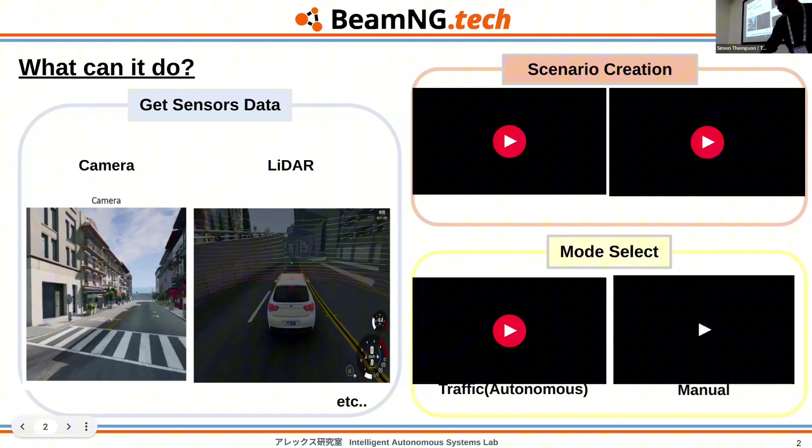So let me go to the next slide. This one. One of the things that motivates us is the availability of maps in Japan, which is something that we don't get from other simulators. Meaning that you have the possibility to drive on the left side of the road. That small thing creates a domain gap. You train something on a simulator, for example Carla, driving on the right, and then you try that on a different side and it doesn't work sometimes.

So BeamNG has plenty of mapping, not only Japan, in plenty of environments in the world. So that will serve to close the gap. The other thing is that BeamNG is being actively used in publications. So just a few extracts of what they have, and they want to attract the community. So they kind of check which publications are referring to their simulator, and they just put the papers on their website. This is their website.

What wasn't available was a way to connect BeamNG with Autoware, so that's where we entered. As I mentioned, we have opportunities to use BeamNG for applications in Japan. So not only maps, I have to say that the number of maps is not super abundant. We have like 4 or 5 different maps, but they are several kilometers long, and they are very realistic. The person insists on the realism of the scenes.

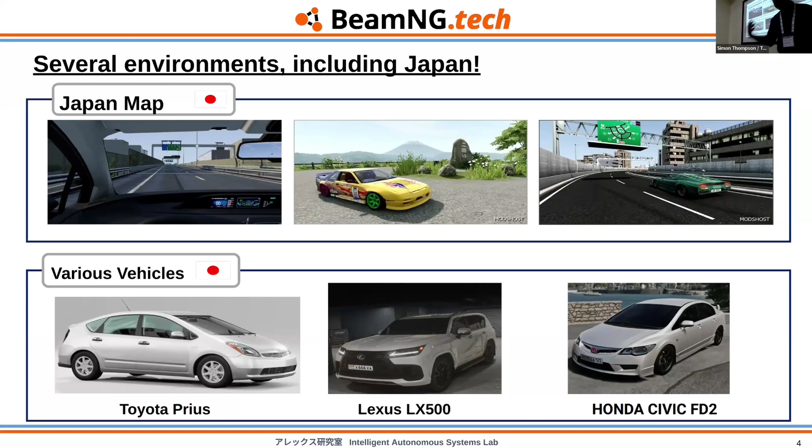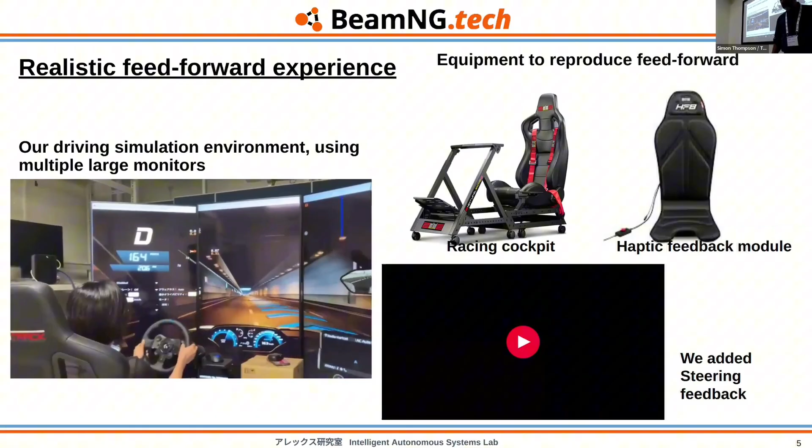So we began with creating a driving simulator with multiple screens. We have three 50-inch screens combined together, the one that you can see in the leftmost video. And then we have the Next Level Racing cockpit. Currently, it's not the articulated one, so you don't have vibrations yet. We need to do more to get that. We have haptic feedback, but the hardware is not the core part of this talk anyway. We did want to provide more feedback to the drivers.

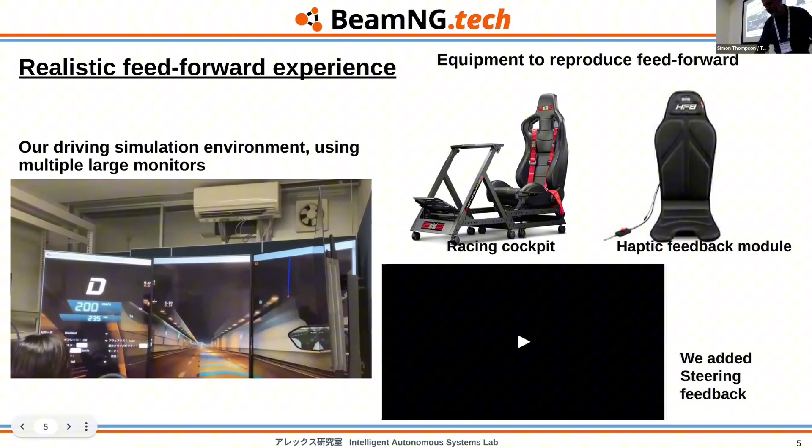So, for example, we also connected the steering wheel with BeamNG and changed the controller so that, for example, you can see the car is losing control and the steering wheel is also losing control. So then you get some additional feedback when this kind of situation happens. Again, the hardware is not the core part. Still, having haptic feedback is very positive when you have experimental subjects and you want to get their impression. For example, one of the research topics we have done is subjective risk, whether the driving improves their sensation of risk or not. But that's a little bit outside of the discussion today.

So up to now, just a brief discussion of what BeamNG is. The other technology that we used, and I'm going to explain why later, is Zenoh. Zenoh is a very low latency protocol that currently is being used as a replacement for DDS in ROS 2. There is already a Zenoh DDS bridge so that you can get data across the Zenoh protocol and then back into ROS 2 topics from one end to the other. So we are leveraging Zenoh. I'm going to get into more details later.

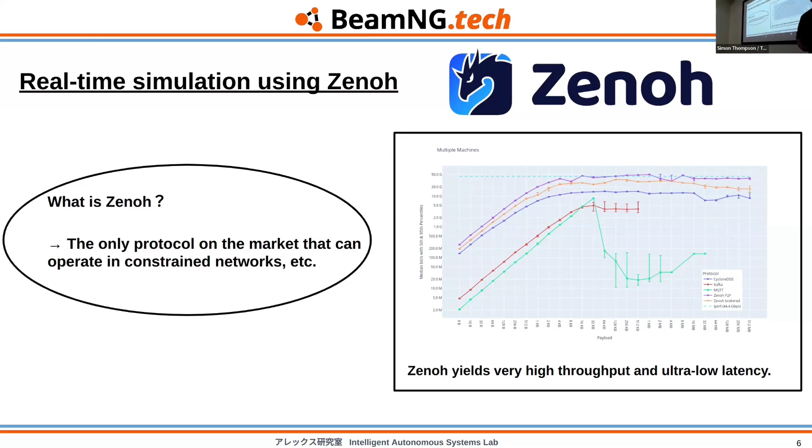And especially when you are driving using a simulator, for example from the pilot point of view, you operate your vehicle remotely. You want to get the data and operate that remotely, and you want to decrease, of course, latency. We are doing this kind of remote operation research and also simulator in the loop. So you have the simulator, the person, and then the simulator is related to the real world environment. So we also want to match these two things together, hardware and simulator.

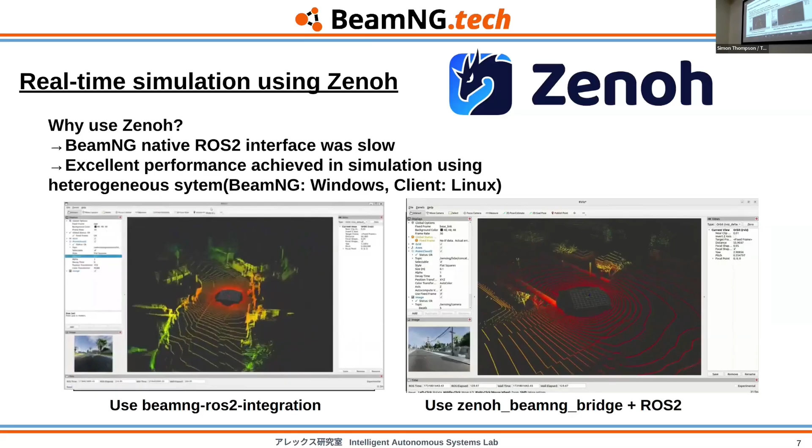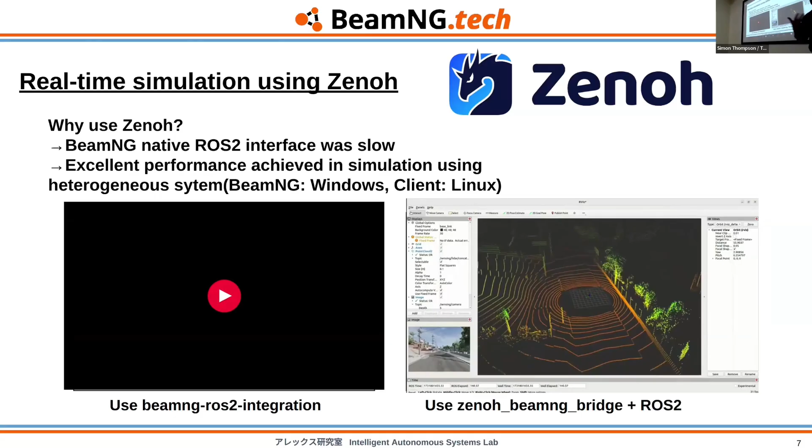Right. So what we do: BeamNG, at least BeamNG Tech, knows that ROS2 exists, and they have already an interface for ROS2. So we are not creating anything new, but it was extremely slow. So you are getting a LiDAR. LiDAR is producing results presumably at 10 hertz, but what we measure is 1 hertz or 2 hertz.

And not only do you have LiDAR, but you have multiple other sensors that you are trying to get. It's not a network latency issue; on the same computer where BeamNG is operating, we just get the topics there, record the topics there, and then you get very slow response time. So instead of using the native interface that they provided, we stepped in and created a bridge that we're going to get into in more detail later on.

So BeamNG Tech, I don't know whether they have a version working on Ubuntu. So our implementation has the simulator running in Windows, and then the client, for example, running Autoware in Linux. So that's how we have them connected. So then what we have is the Zenoh BeamNG bridge that we created. It is open source. And then once we have the data passing through from Zenoh, we can, yeah, yes, please.

Is this a VM or two physical machines? Two physical machines. Yeah, so they can be connected. I mean, because of the low latency, you can have them in different rooms. It's not much of a problem. So no, they're not virtual machines.

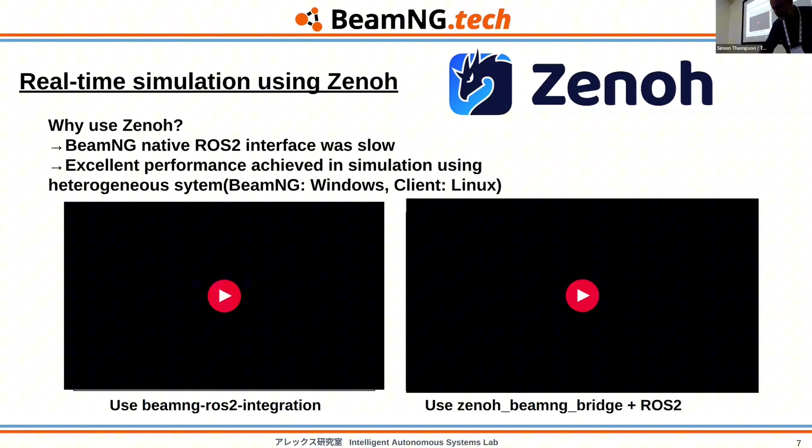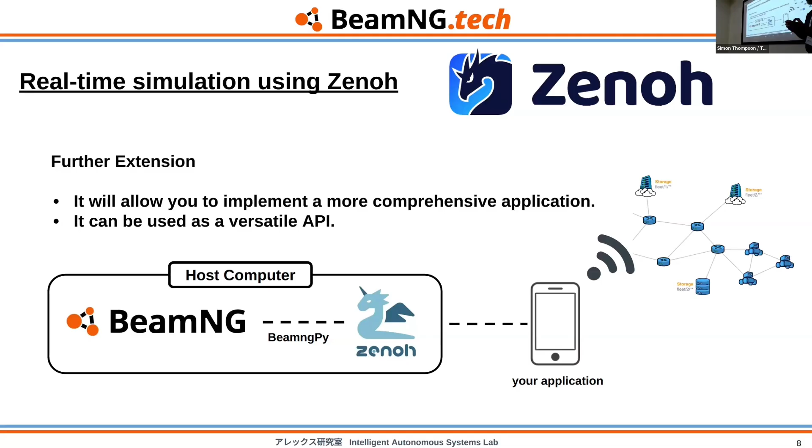So, right. So that's what we're doing. We have BeamNG. We use the Python interface that BeamNG provides, BeamNGpy. Created a Zenoh-based bridge, and then we have that transmitted, and then we can do anything that's necessary. Of course, our purpose is to use Autoware and get the BeamNG data to Autoware and Autoware back to the control so that the BeamNG vehicle can move. But of course, you can do anything else. So it's not tightly integrated. The BeamNG Zenoh bridge is not fundamentally dependent on Autoware, so you can have multiple different applications.

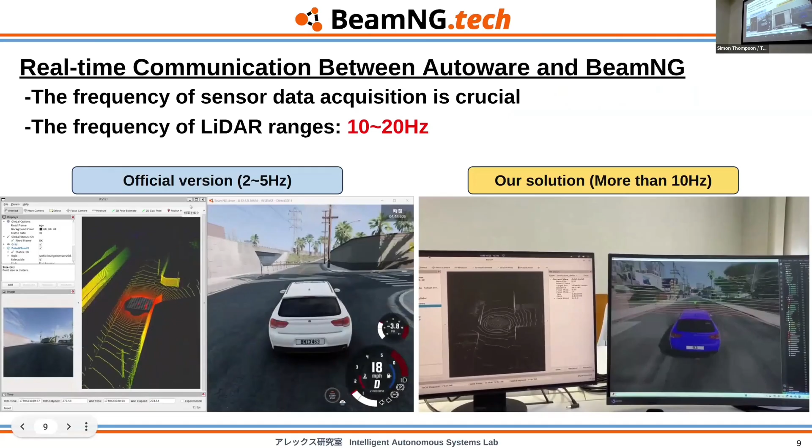So this is what I mentioned before. It's difficult to show in this video, but basically the two videos are different. One is very choppy, 2 to 5 hertz response that we obtained. The other one was just real time, no delays observed when we are getting the data. And then you can see the data being sent and visualized in RViz. So after we pass the bridge and get the Zenoh to ROS conversion, you can visualize it normally. So it was one small step that we added into this implementation.

So we have one end of the road. The other one, perhaps if you are familiar with Autoware, is not so complicated. Now you are able to get data from BeamNG. So what do we do next? Autoware needs maps to navigate: point cloud maps for the LiDAR localization. We need to have HD maps for the planner's navigation. So that means we need to collect BeamNG's data, at least LiDAR data, to get the point cloud. And then, based on that point cloud, use existing tools to make the HD map. And that's enough for the Autoware side.

So yeah, you can use whatever mapping software you are familiar with. We use LIO-SAM a lot. If you check the Autoware GitHub site, in the tutorial pages you can find which mapping solutions exist that can be used and have been tested with Autoware. Some are ROS1 only, so then you need to meddle with the topics that Autoware is using for LiDAR, for example. LIO-SAM is directly ROS2, so it is easy. You just need to have LiDAR and IMU. Both are provided via the bridge.

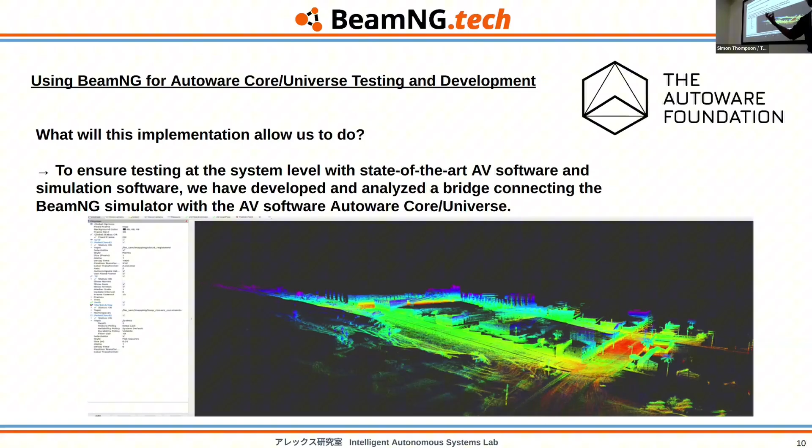So we are sending camera data, and we have LiDAR data and IMU data from BeamNG Tech back through the bridge to Autoware. So then we can record a ROS bag with this data. And then after that, just play the ROS bag file, populate the topics, and then use LIO-SAM, which also uses ROS2, connect with the proper topics, and then render the map.

So again, this discussion is not about mapping, but if you have any questions about the mapping tools, of course, I'm happy to explain. But this is just the process of building the map as LIO-SAM is executing. LIO-SAM again depends on IMU for posture correction. LIO-SAM is a graph SLAM method, so loop closure and everything is handled. So that's a correct tool.

And for the HD map, we use the Tier IV vector map tool, or Vector Map Builder, I think is the name. So basically, both tools are available online, so you can use anything that you require. The Vector Map Builder, I'm afraid, is by hand. So this was done by hand by somebody. I guess we can use some automated tools for making Lanelets, but we did it manually.

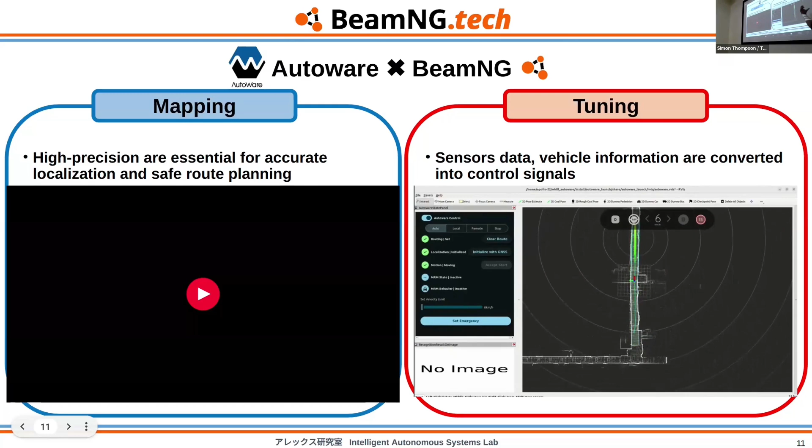So anyway, it was a low scale, not very large map, a few hundreds of meters. So that's basically by hand. But yeah, maybe other tools can be exploited. Then we have the point cloud for localization. We have a Lanelet2 map necessary for planning. And then we have the necessary data.

Okay, so once you have, yes. Question for the concept: so you get the point cloud, then you make all this map building, manual steps and so on, and then again you localize them? Yes, because we need to make a map, right? Autoware needs this. BeamNG is not providing the map themselves. I just want to ask, does this work completely with this virtual approach? We don't need any real one, right?

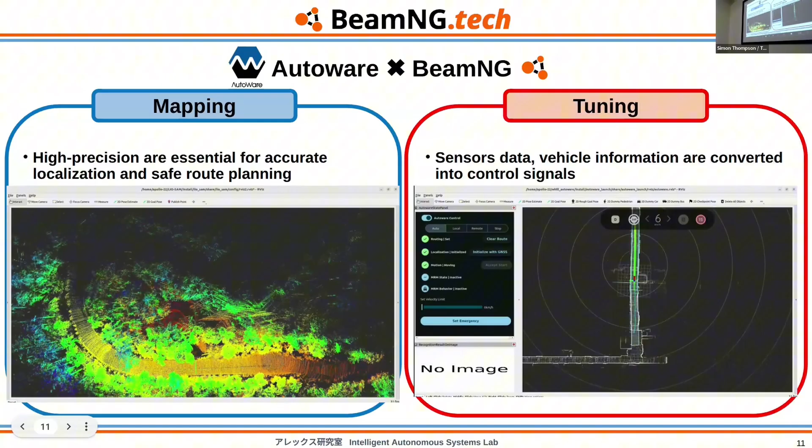Okay, well, if your map happens to be the same as the real world, yes. But no, this is within the virtual world. I mentioned that BeamNG has a lot of emphasis on realism. There is a road in Japan that they also have in the simulator that's very much the same. But of course, there have been different changes in the traffic infrastructure, buildings gone or new buildings constructed. So that may decrease the performance of localization. We haven't tested cross real world versus simulation localization.

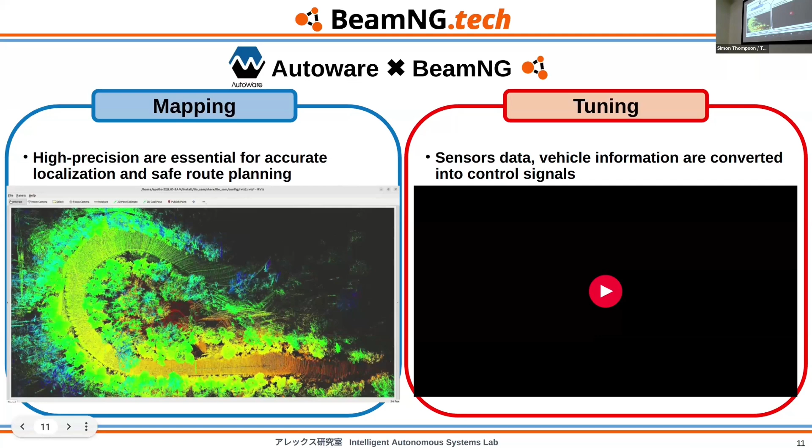So basically, this is a map of a mountain in Japan, Mount Tsukuba. So it is a mountain road. We just get the data from the simulator into a rosbag file. Just record the LiDAR data, IMU data and camera data as they are provided. Then in an offline mode, we process the LiDAR data with LIO-SAM and other mapping tools to create the point cloud. Once you have the point cloud, you have to create a Lanelet map. The current Autoware Universe depends on maps. One of the efforts of the community is to remove that dependency, but again, outside of the scope of this talk. So yeah, all that's done offline.

Then presumably you have the point cloud that corresponds to the virtual environment, so you can link the two things together. There are some driving simulators that allow you to get directly in one go the map that you require. I think CARLA provides that. Among the different things that the CARLA bridge provides is the point cloud map itself, and because they use the OpenDRIVE format for HD maps, they are able to convert that into Lanelet2 and also send it as a topic.

BeamNG doesn't have that yet. We have been working with the company to mention what we require. So this process of mapping may become unnecessary in the future, because they have the renderer. So they are able to export directly the point cloud maps and the road network. If that's available, then we don't need to do this.

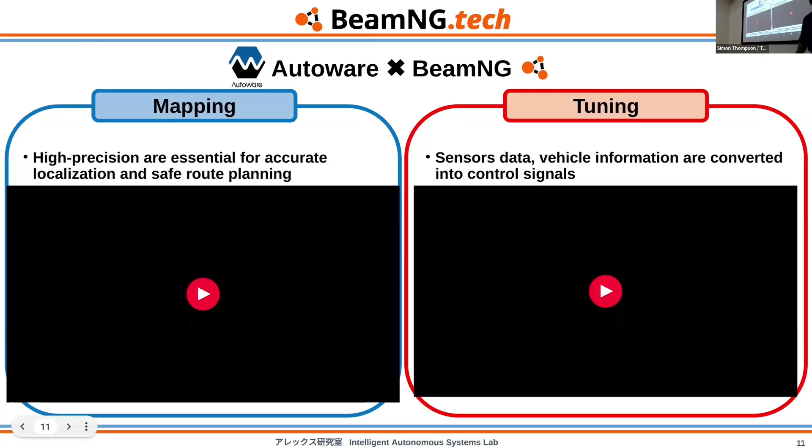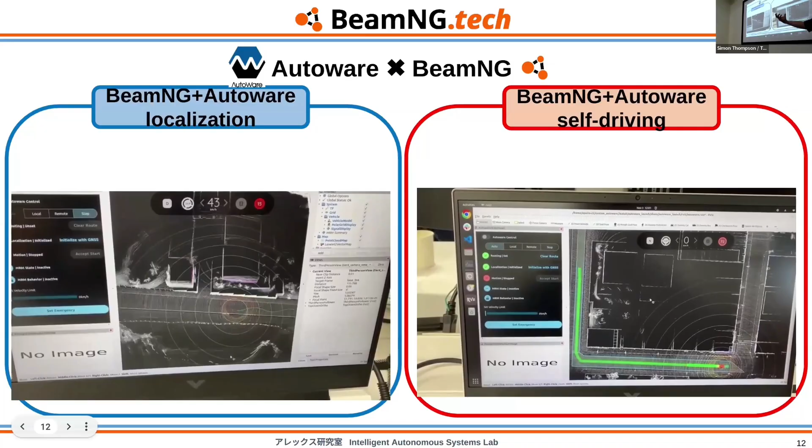Okay, so now that we have the point cloud map, we get localization. Actually, some person is using the steering wheel, showing Autoware is keeping its position correctly, no matter if the car is zigzagging along the road. We have two computers. BeamNG is sending LiDAR data across the bridge, and we have the offline map that we created. The LiDAR data comes in and localizes with the map on the Autoware side. And so you are able to get this kind of result.

The other thing that you are seeing now is Autoware localizing, and this is self-driving mode. So now we are in control of the vehicle. The video before was in manual mode, so somebody was just swinging the steering wheel.

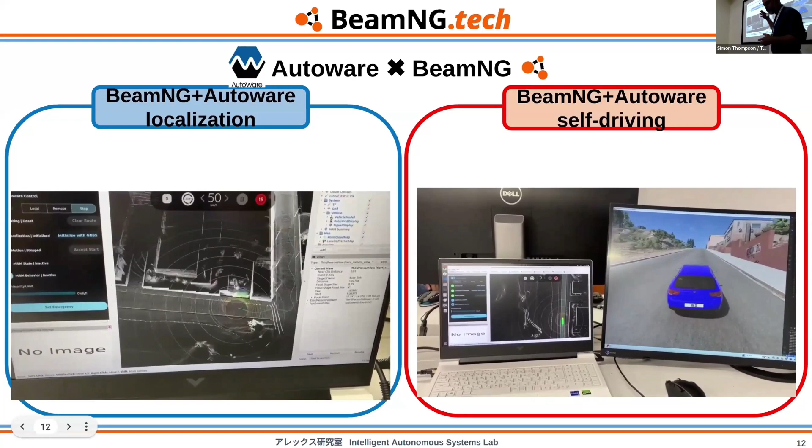And then we can confirm the localization is working okay, because you can see here that the position of the car is correct in the world coordinates, or at least in the map coordinates that we have. On the other side is BeamNG, and we are running Autoware. So here we are defining the destination somewhere there. So now planning is done, and then we can start driving.

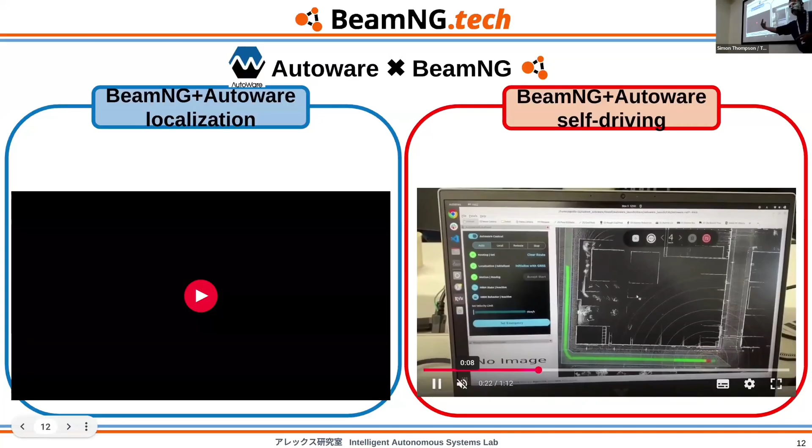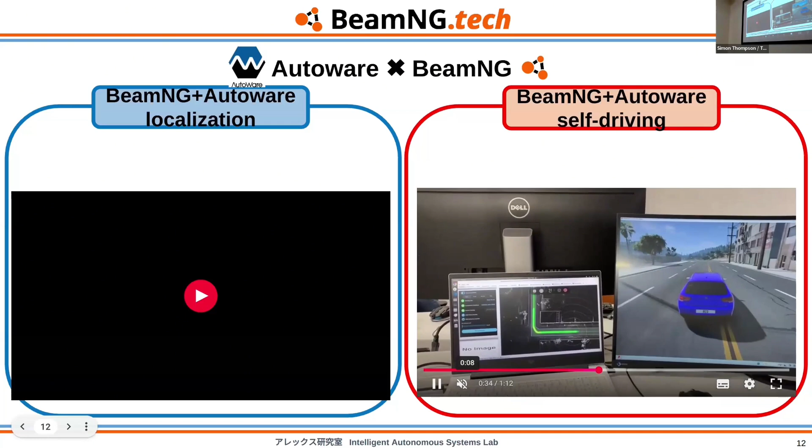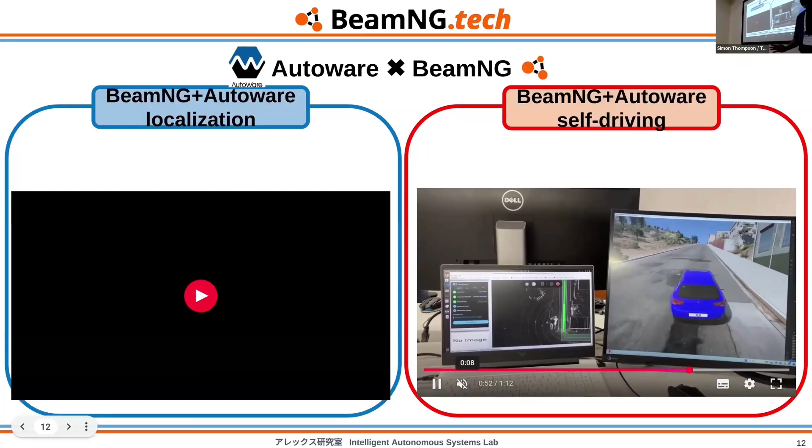So that means now that there will be an inflow of topics from the Autoware side to BeamNG, so that BeamNG is able to move the car. So there are some preparations that are necessary for that. I'm going to mention that in a moment. This is a map in San Francisco, I think. So the next is a hilly road, so it goes uphill, and well, the vehicle is driving correctly. All right, so then we have shown that we have correct localization and correct self-driving.

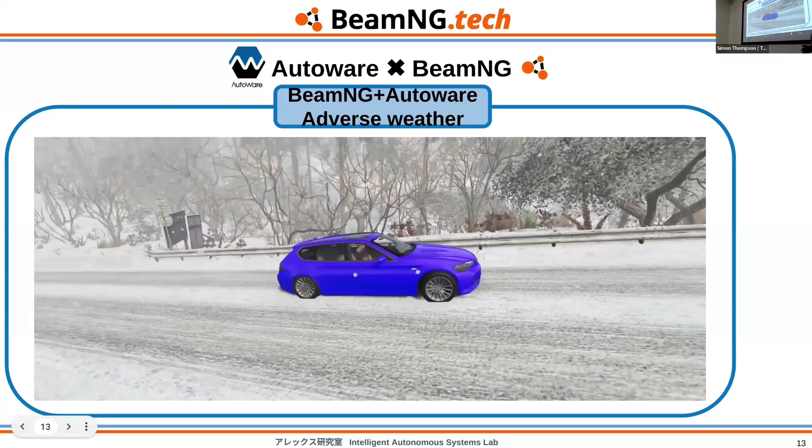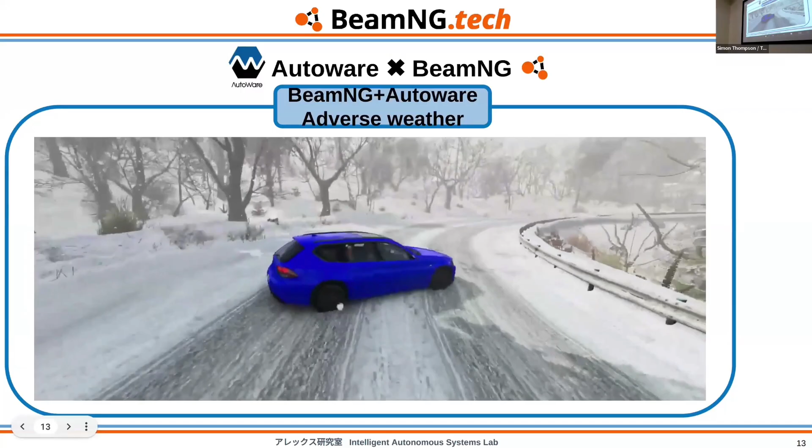Then another thing that we have in BeamNG is that we can test. Autoware has not been tested, not conditioned, not tuned at all for bad weather, not for slippery roads. But because the vehicle drives with soft body physics and understands slippery roads and so on, at some point the vehicle is going to slip, like now. Autoware loses control. Autoware doesn't know that the vehicle has slipped and then it is in a stale situation. That again is outside of the scope of this talk.

Now we have a simulator tool that is able to provide these kinds of situations that others did not. So that's another, I think, very positive thing about adding BeamNG into the zoo of simulators that are available for the community. So we have other conditions for testing.

So a little bit more into the technical details. So I mentioned, for example, that we have two sides, the Windows side and the Linux side. The Windows side will have the BeamNG.tech implementation. You need to get a license from the company. It's not complicated. The driving simulator itself, I think, is not open source. They have different modes for you to discuss with them, but of course, the game engine, like in many cases, they do not share the code.

But they have a great Python interface. That's the one that we are leveraging for this implementation. And then to transport data from BeamNG towards Autoware, because of the issues I mentioned before with their ROS2 implementation, we created the Zenoh BeamNG bridge. So basically, the code is available. I believe that at some point I have the link. So basically, it's just to transport everything that we found necessary on the Autoware side.

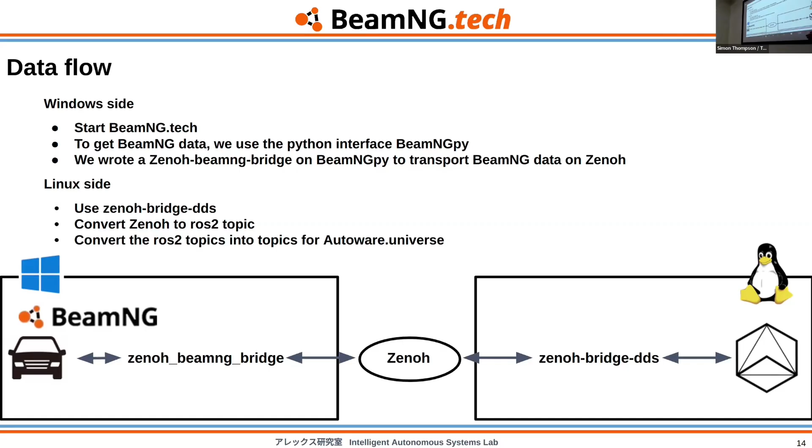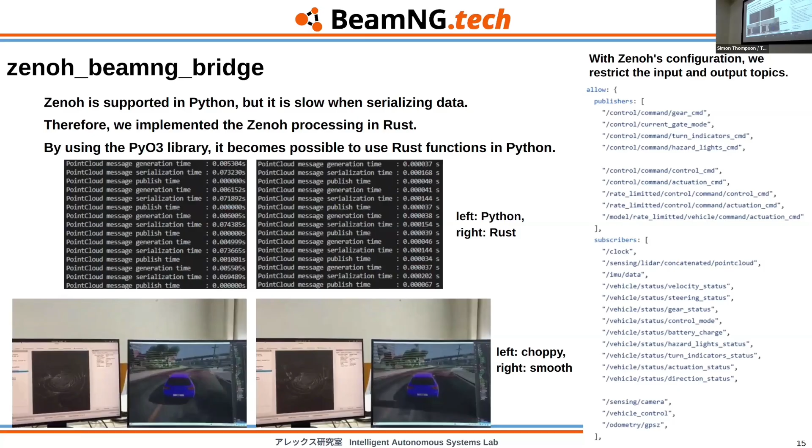And then on the other side, we have to convert from Zenoh to ROS2. So Zenoh bridge to DDS. So go back to normal ROS2 topics and then use that in Autoware. So a few more details. What you don't need, you don't need to send. Therefore, we are able to create a configuration where we export what we think was necessary for Autoware. For example, IMU data, vehicle information, cameras. At some point it should be LiDAR, point clouds, etc. So what we're providing, what kind of commands and what kind of publisher will be getting the data is included there.

And so there was a small technical issue in the implementation using Zenoh, which is that while we have the BeamNG Python implementation, the connection with Zenoh was slow. Actually, we need to serialize the data, and for that, the implementation in Python was not very efficient. So my student chose to use Rust.

So well, it's very blurry here, but I don't know. Do I have a way to magnify this? No, I guess not.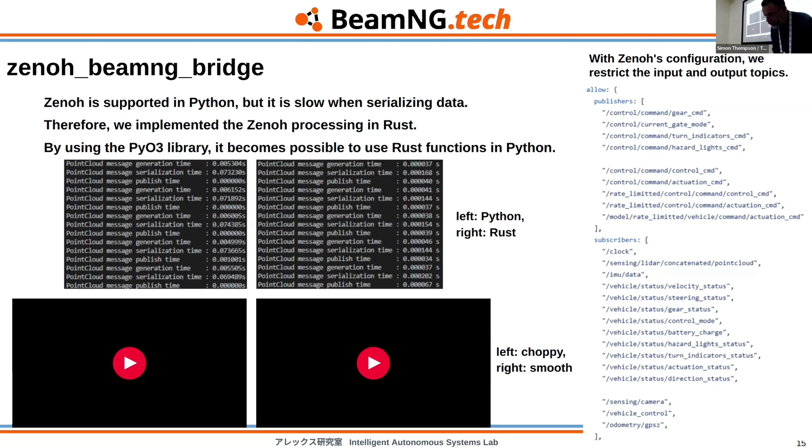BeamNG will have a coordinate system that may be different from Autoware, so we just had to do a coordinate transformation. One small thing in this implementation.

If you look for Zenoh BeamNG Bridge, you'll find the open source implementation for this work.

We've had some issues. For example, Autoware gets the data from the point cloud, among all the different topics. The point cloud has to pass through the point cloud preprocessor, doing stuff like removing the crop box, removing or filtering out the data that you get from the LiDAR, as the LiDAR is mounted on the car and it's perceiving the body of the car. For example, you don't want to get the bonnet of the car or the windows, etc., because that may affect the detector.

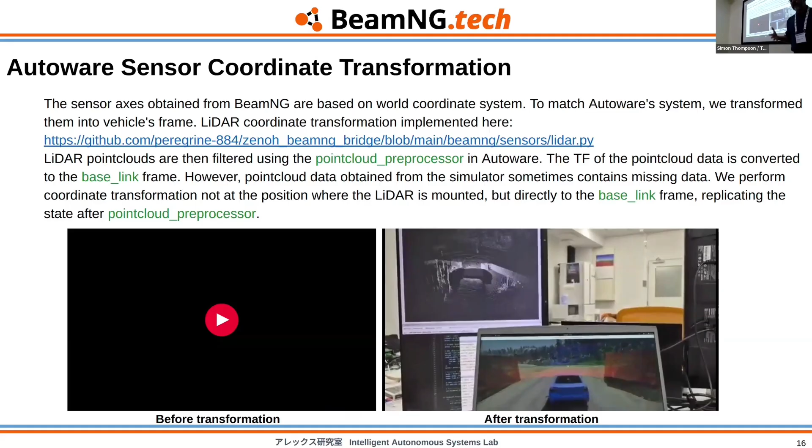So crop box, range filter, for example, if you want to filter your LiDAR data no more than some maximum distance. Autoware allows you to filter the data aligned with the lanelet, so if you don't want something very far away, not in your immediate vicinity, the LiDAR can provide you that, but you want to concentrate on what is in the drivable area. Autoware has this kind of preprocessing functions in the space.

But we found that there were several data missing, that even if we followed the same structure, we were missing some data that the simulator is not providing, assuming it is 0 or something. So we had to do additional transformation: first a coordinate transformation according to what Autoware specs, follow the same preprocessor, and then we have to extend or modify the point cloud again to provide that missing data. The final transformation we do to accommodate this missing data, that the simulator was failing to provide or was providing fixed distance data, we basically do directly in the base link frame, which is after all this point cloud preprocessor happens.

One important limitation that other simulators also have is that BeamNG Tech doesn't have proper LiDAR intensity information. The point cloud format that Autoware uses, part of the Cartesian coordinates as I said, requires intensity information, timestamp information, range information, and many other fields. We cannot accommodate to that, but we try to provide some solution to this intensity not available issue.

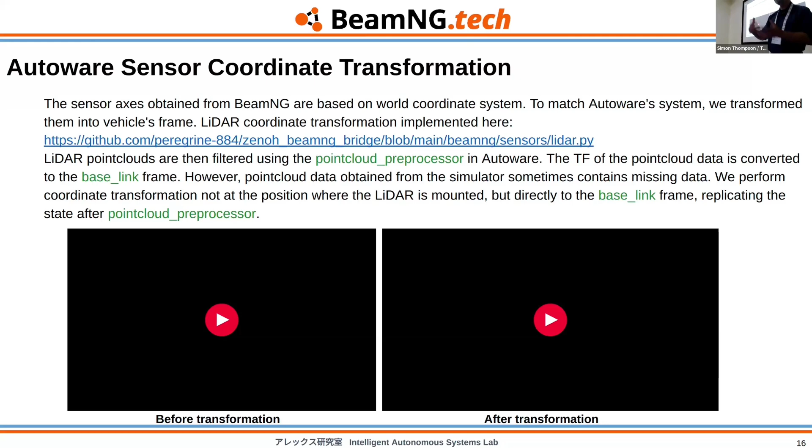So one of the things I wanted to finalize in this slide is that we accommodate the point cloud, even if some data is missing, to what Autoware is requiring in different stages.

So what else is necessary? When you see the code, basically Autoware in the source code has sensor kits. So you have the core functionality, but if you have your own vehicle implementation, there will be part in your source code structure when you create the launch files, configuration files, parameter files, where you have your vehicle according to the vehicle physical properties, where you have your sensors, what is the TF tree of your sensors in your car implementation.

So we also did that for some cars. And also, what's the sensor kit? What sensors are imported or provided in the car? So we have a branch from the vehicle interface, the sensor kit are sub repositories, so we clone that repository on our own.

So we provide a few of those configured vehicles as well, so you can understand how to tune things. One of the final things that was necessary is the low level control of the vehicle, how the vehicle reacts when you are pressing the pedal in your simulator tool. Say we're using a Logitech G29 with the pedals. When you are pressing the pedals, it's not the same as a real car, so how to convert that into the necessary acceleration curves that Autoware needs.

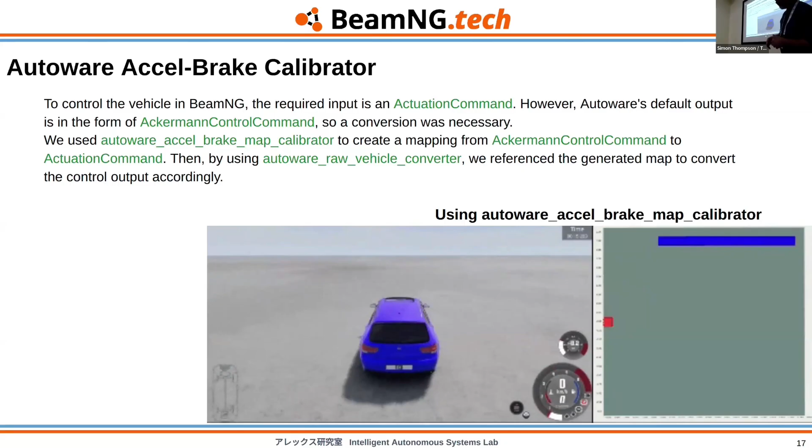So in order to have a vehicle that is reacting as you expect, it's not just that you create your car and your environments, you also configure your vehicle's parameters. If you are driving on off-road environments, you can run this to get the proper acceleration and braking curves according to the environment you're using. At the same time this will give us the calibration map and a way to get the necessary commands that BeamNG is expecting on the other side of the pipe.

A bit short on time, but this is the talk that I had prepared for today. The code is available, it's open source. If you enter the GitHub site now, maybe you will see everything in Japanese, but we are also working towards multiple languages, and these manuals are going to be there too.

We presented this last year at a similar working group in the Autoware Foundation. We invited BeamNG also to join, so they showed what the simulation tool is capable of, what it can do. Now there is interest in the community, and I'm really happy that among those are you guys sitting here hearing my talk.